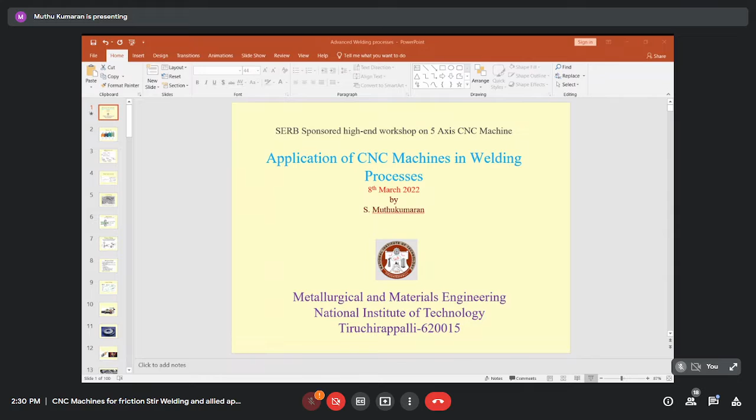Sorry for the interruption. The slide got stuck from the first slide, sir, it's not moving anywhere. I think there is some issue I am having - only my first slide on application of CNC is visible. Even the Industry 4.0 slides are not visible. Let me try sharing again. Some difficulty, let me avoid enlarging - I think that way I can fix it.

Okay, now it's moving. Yes sir, now it's moving. Okay good, let me make it full screen.

What I'm telling you is that we are able to provide a nano coating on the front glass, the viewing glass we have in automobiles. That is a new development - we can avoid the wiper mechanism entirely. So here also, this is precision manufacturing.

All this precision manufacturing is feasible because of the development of microprocessors. CNC machines also rely heavily on microprocessors. All the developments in what we call Industry 4.0 are feasible because of the development of microprocessor and internet technology - these two are the backbone for all Industry 4.0 developments.

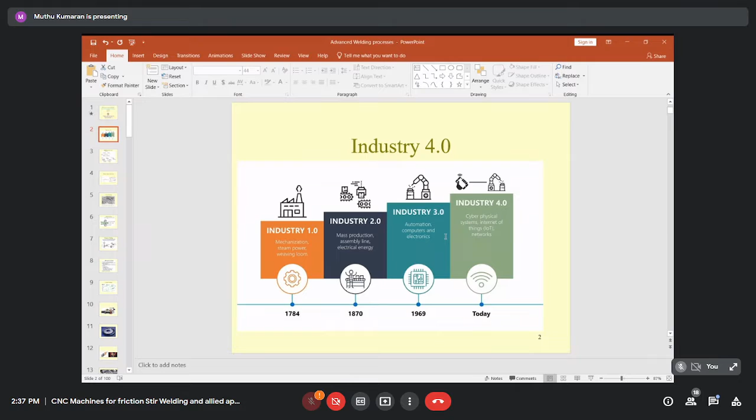Okay, so this slide, I hope the slide is visible. Industry 4.0. The backbone for this industry 4.0 is microprocessor and internet technology. Both are backbone for this industry 4.0.

Coming to different types of processes, I told you just now. Let me discuss the importance of this CNC controlled machine in manufacturing, in particular welding, because machining operation has many lectures already, and many lectures are yet to come. Let me focus on this area because this is also a very attractive field, welding engineering. Very, very interesting, and lot of job prospects are there.

Let me explain the requirement of a CNC type machine, what are the challenges in using CNC type machine in this welding application.

Classification of joining, you are able to see. Dr. Dinesh, is it okay? Am I audible? My slides are moving. Yes sir, it's fine. Shall I proceed? Yes sir, yes sir, okay okay.

So, see, broadly we can classify welding processes into solid state processes and liquid state process. And in both these fields, CNC control machines are used, both solid state and liquid fusion welding processes, for automation and precision manufacturing.

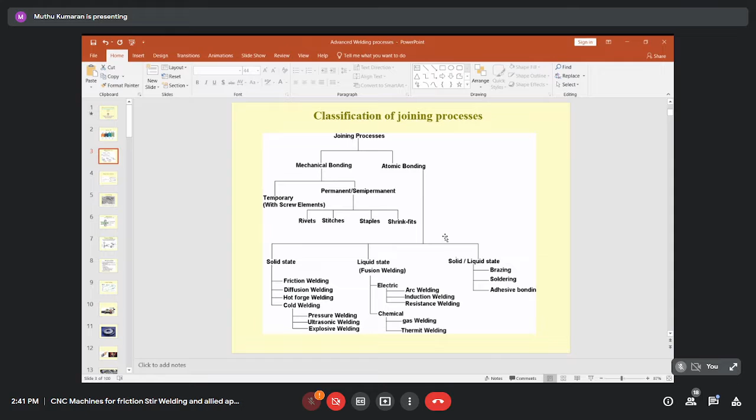It would be very interesting to note the challenges. We know automation, CNC machine controls, and we are able to make programs, but it's very interesting to note that there is a lot of challenges in designing a CNC control machine for solid state welding processes. I'll show some machines and explain how complex it is. For that, you should know the basics of welding, the very basic behind joint formation. Only then can you appreciate the requirement for CNC machines. Without understanding what is happening in welding, you may not be able to understand the complexity of designing a CNC machine for a particular welding process. Let me take two or three minutes to make you understand what is happening during welding.

Suppose two atoms we have at infinite distance. Left hand side, let us have one atom, right hand side I have one atom. This left hand side atom is having electron and proton. This right hand side atom is having proton and electrons. Here left also having electrons and protons.

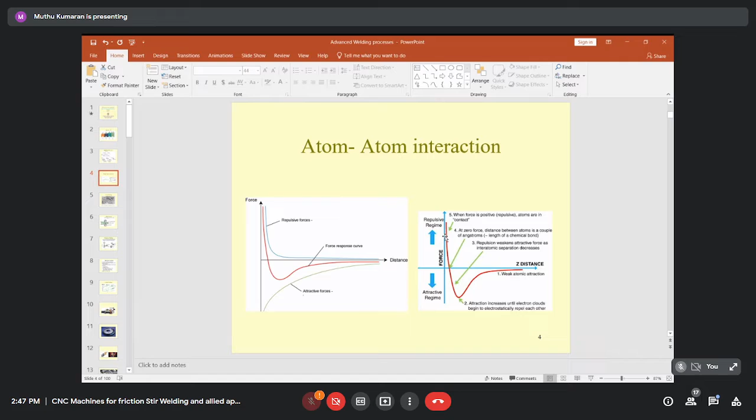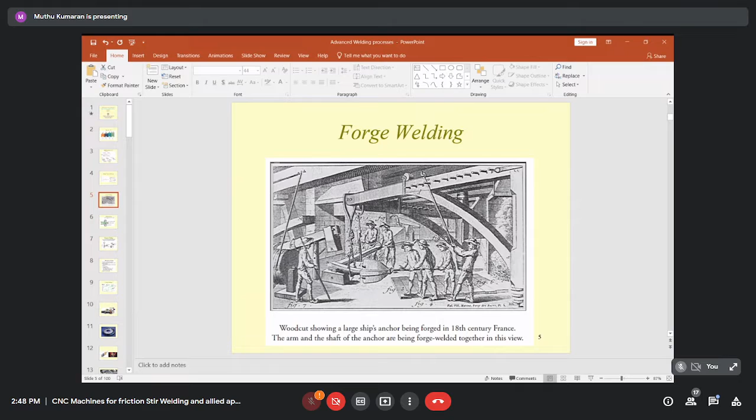So this is an older method, very crude method. Even our iron pillar, even today it is rust free. It was a forge welding process, the oldest method of joining process. Just I'll skip this thing.

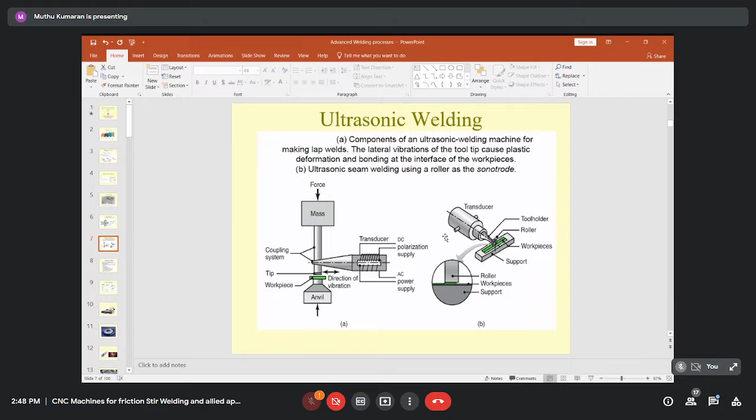See, all these are ultrasonic welding processes. This also needs precise control, controller, microprocessor control based on the application. Again it depends upon the application, where we are using it, that is important.

Coming to friction welding, just as I told you, two rods, friction heat is generated, and a force is applied. It looks very simple, but because of this force component, of the order of 10 kilonewton and 12 kilonewton, we should have a rigid machine, and that too with micron level precision. It is very challenging because with force, a lot of deflection used to happen, but still a lot of controls are essential to achieve the required precision.

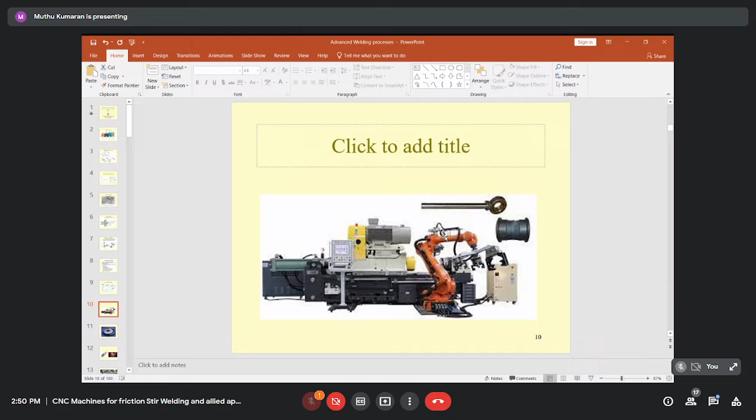Even a piston is made by friction welding, I'll show after 2 slides. This is manufactured by a CNC controlled friction welded machine. Suppose a four-cylinder engine, four pistons we need to assemble, so we need to go for mass production.

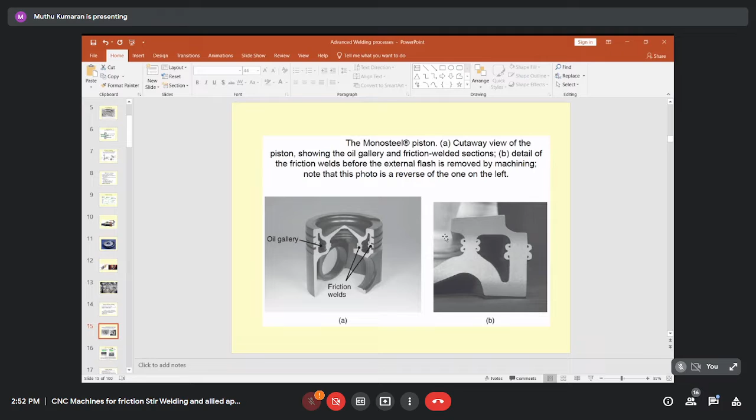As you know, a lot of forces are involved in making this component, and still the system should be rigid enough to carry out welding with precision. That's why the machines are very expensive. These CNC controlled machines for automobile manufacturing, welding machines like this are very expensive because of the force components. That I want to convey to the audience. Okay, now again, this is a linear, see, simple.

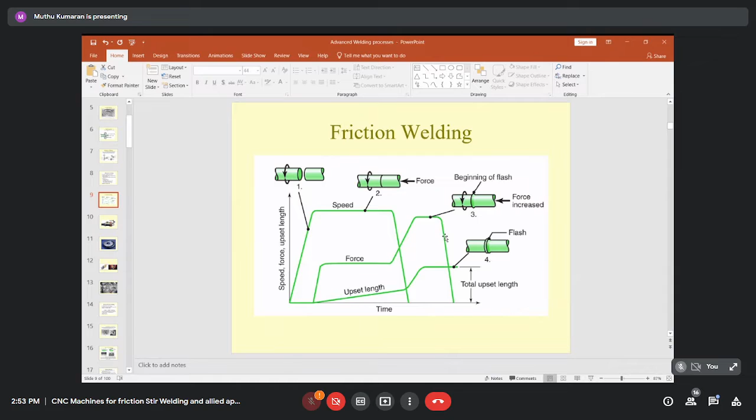One rod is rotated, one rod is stationary. Force is applied, and it gets into plastic condition because of friction, and the force is increased. It stopped. It looks simple, but doing everything in a cyclic manner with precision is very challenging. So the machines are very complex to construct, with a lot of microprocessor controls involved, and they are expensive too.

In aircraft, we use two types of engines. IC engines, internal combustion engines. One is the reciprocating engine, similar to what we use in our cars, and another is the turbo engine. In the turbo engine, there's a turbine. The turbine rotates, and this type of turbine blade is used in aircraft.

So by what method can we achieve the welding of these blades? Would anybody give some suggestion? Which method can we use? Which process can we make use of to join the turbine blades? Any idea? No idea? So anybody could share? Anything? If you have anything, you can share with sir. Please, because I want it to be interactive, otherwise I keep on talking.

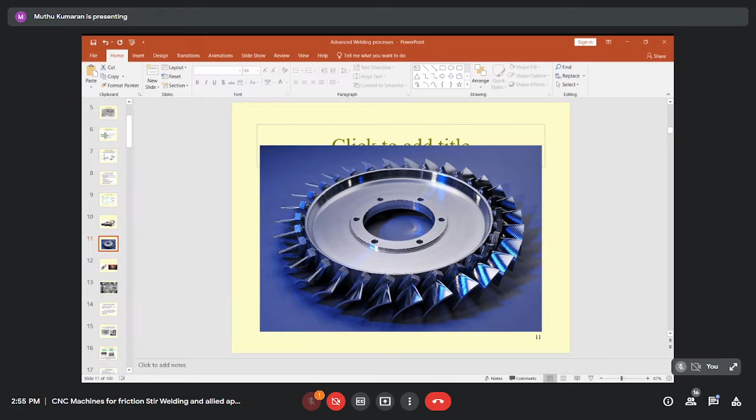Okay, let me share with you, it's very interesting to note. This is welded by linear friction welding. Linear friction welding is a very interesting method where two rectangular shapes are rubbed together, as shown, with force applied. Here the control we discussed, the microprocessor control, is very, very essential to get the desired product.

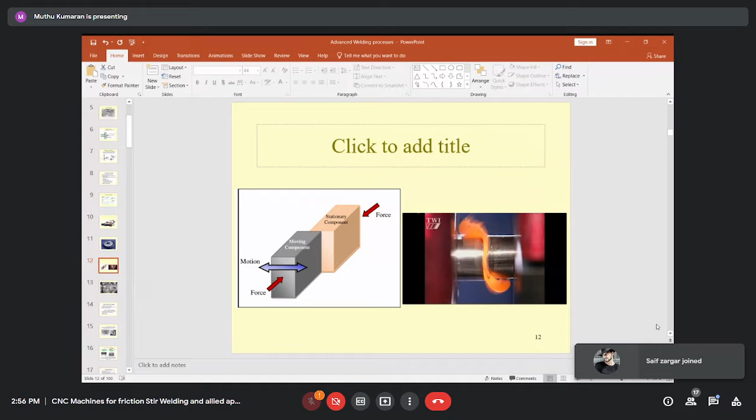This is not a power plant, this is a linear friction welding setup. What I want to tell you is it's not so easy to use a CNC controlled machine. We need a CNC machine, but it will have a lot of challenges which need to be sorted out. So these machines are very expensive.

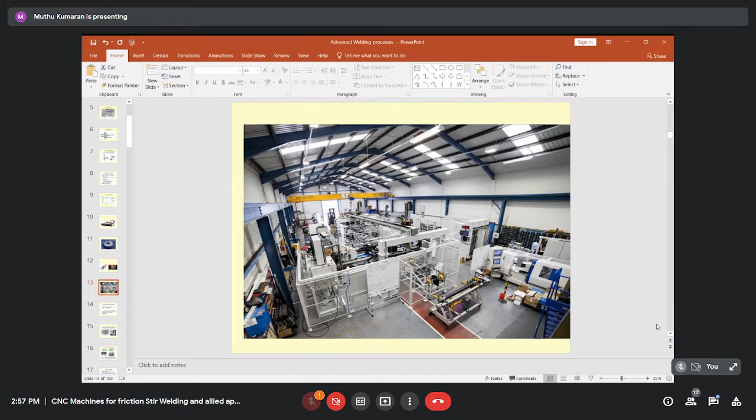Recently, IISc Bangalore, Professor Satish V. Kailas purchased linear friction welding equipment for the first time in our country in education, and he invited us to use his facility. Dr. Dinesh, you also can use the facility because you are also working in the welding area.

So let me skip these slides. See, in aircraft manufacturing, we are safely able to take journeys because a lot of components are made with advanced processes. Precision, here the precision is very, very important. Reliability and precision are very important.

Each and every time, key parts like the turbine blade I showed are checked by the ground engineer. Once the ground engineer sees there is no crack, no macro damage, only then will the takeoff take place. And at every routine interval, they go for repair.

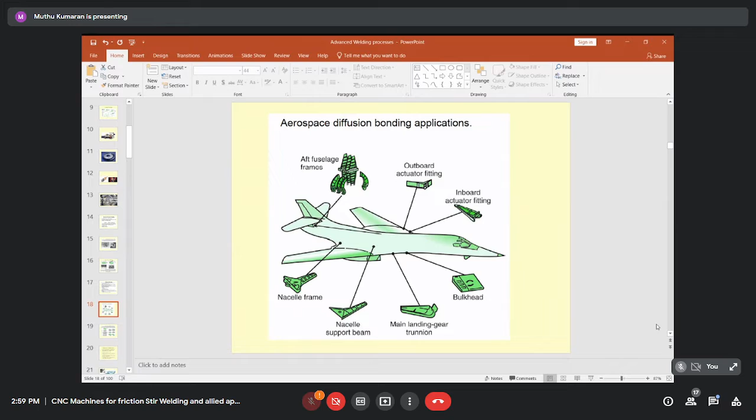One of my students is working at a Rolls Royce engine repair station in Singapore. He used to share a lot of his experience with me. He says whenever an aircraft goes for maintenance, they remove the old engine and mount a new engine, and the old one goes for 3 or 6 months of complete overhauling, kept as a spare in the meantime. It's just like changing a railway engine, they remove it from the aircraft and it goes, but the aircraft remains functional. But for the engine alone, they have to ensure reliability following a lot of code standards.

Yes, let me pass on this. Friction stir welding, similarly, is a very interesting process. It was invented in 1991. It looks so simple, a rod, a tool is rotated, and it generates friction. It moves. We did a lot of research on the mechanism, and we also contributed in this direction. And Dr...

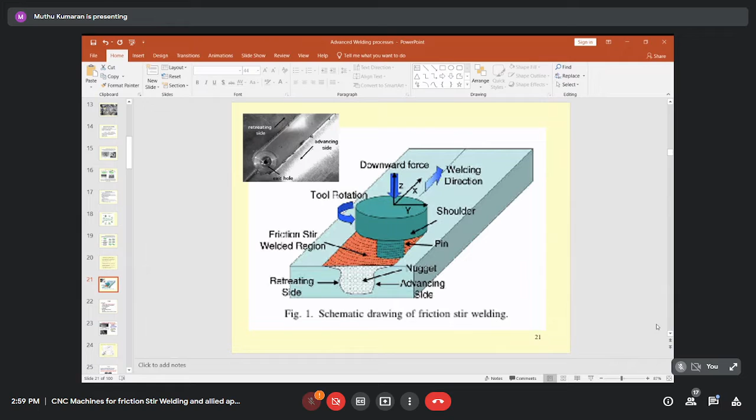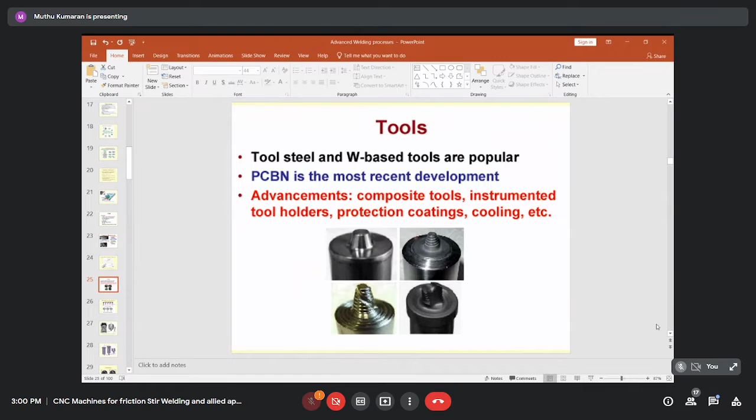So I don't want to talk about the mechanism, Dr. Dinesh, some other occasion if you want you can learn from Dr. Dinesh. It's got a lot of advantages. Only 2.5% of the energy consumed by laser welding is used in this process. That's a very big saving, no? Energy saving is very huge here. And there are a lot of advantages with this process.

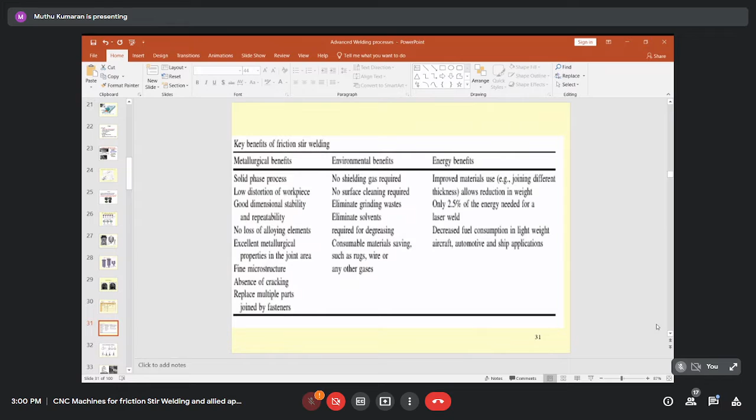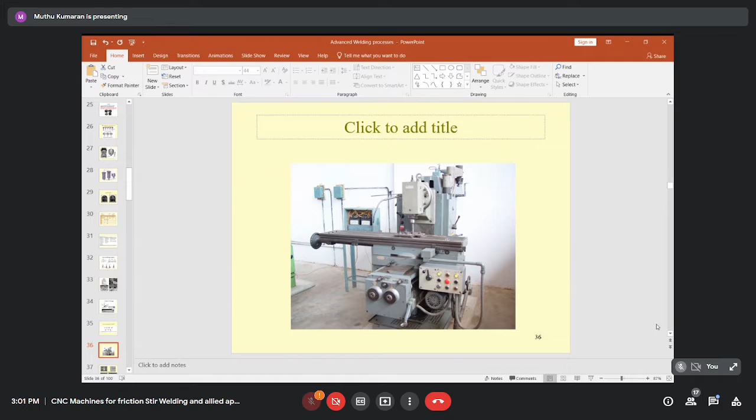There's a lot of variants in this process. So this is a machine which I used in 2004 or so to develop this process. It's a conventional vertical milling machine. At that time I was working in Birla Technology. There I developed this process because at that time it was nowhere available in our country. So with this machine I could publish the first international journal paper in friction welding from the Indian side. And my PhD was the first PhD in friction welding in India because of this machine. This is a very very simple vertical milling machine.

Now we purchased this machine for our lab. When we purchased it, it was 75 lakhs, around 2014. Still it is in working condition. There's a minor problem, but overall this is precision - no matter what we tell, see the rigidity, the structure - this rigidity is essential because of the force component. With this force we need precision. There only the problem comes, there only the challenge. So a lot of controls are essential to achieve the required precision with the force in the range of 10 kilonewton, 12, 15, 20 kilonewton like that.

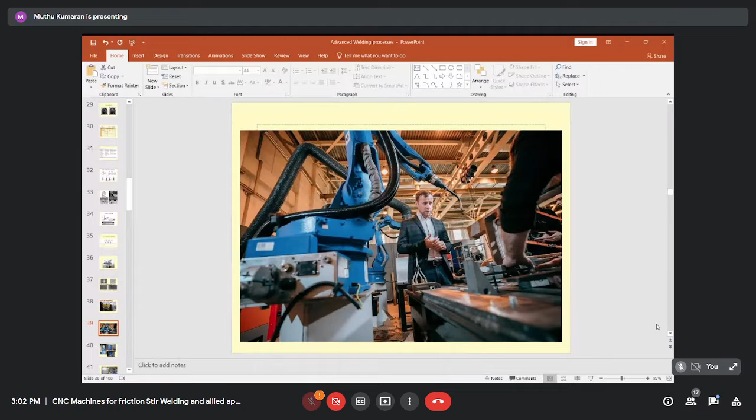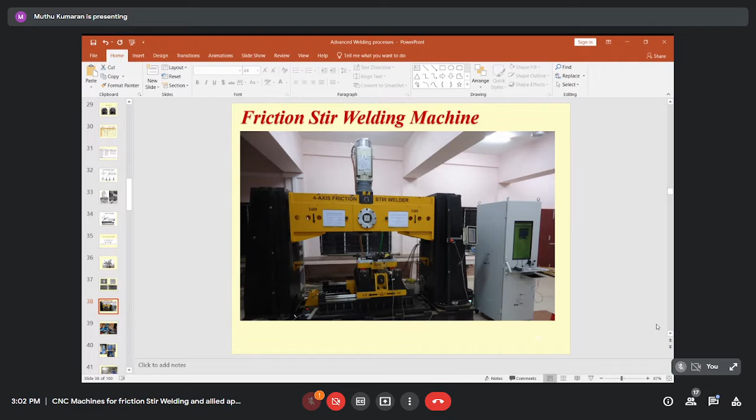So what I'm showing is also a friction welding machine - a CNC controlled friction welding machine for space applications, to make a component with different contours. See, in space we used to call it a mission. Normally if you go to Delhi and come back we call it a travel plan, but they call it a mission because many missions failed due to small deviations in dimension. Because there's a micron level deviation, slightly more gas will pass, and it will spoil the total mission.

So the precision is very very important. CNC controlled manufacturing processes are very essential for space. These are all very precision manufacturing. There the cost is secondary, they need precision - this is aerospace and nuclear. Precision manufacturing is very very essential.

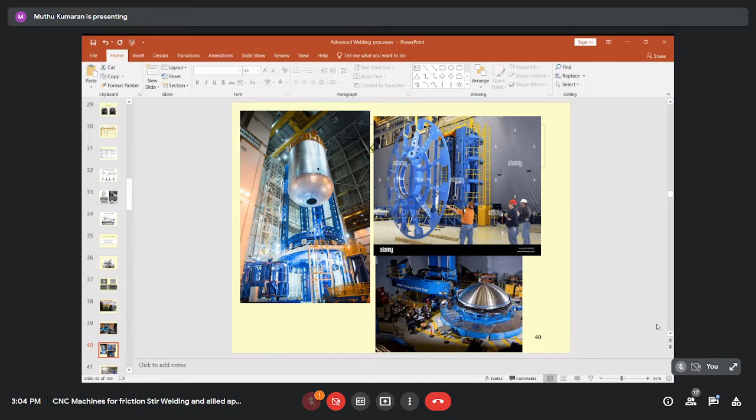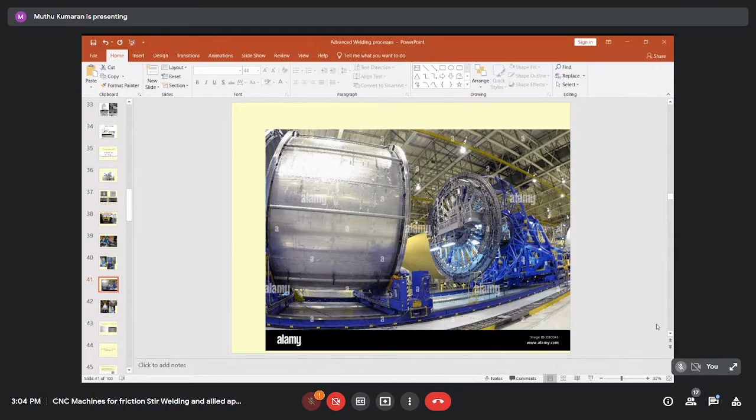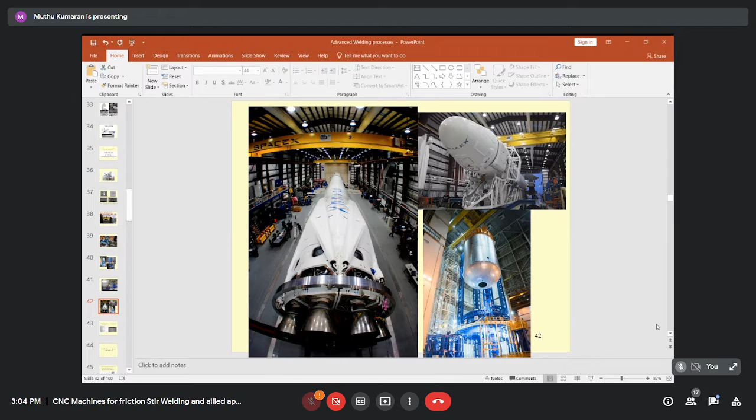So this is another arrangement for friction welding with our CNC control. You can see here SpaceX, Elon Musk - he is showing a lot of interest in SpaceX. So these are all friction welding machines available in SpaceX to manufacture some of the key components. So this metal flow, let me skip.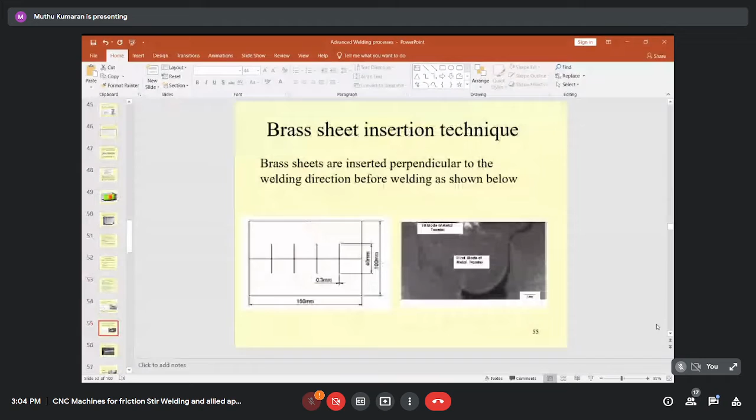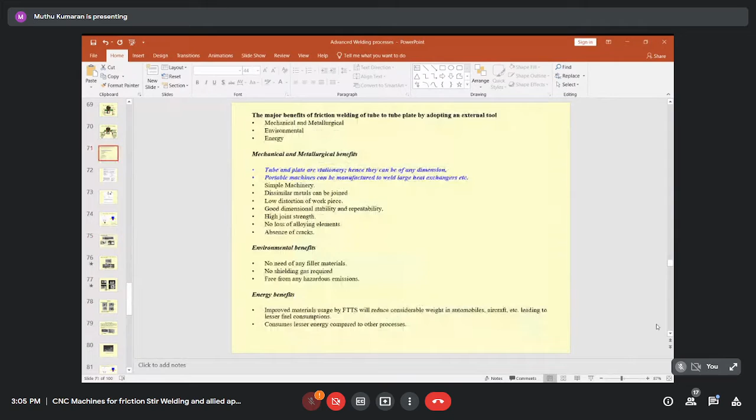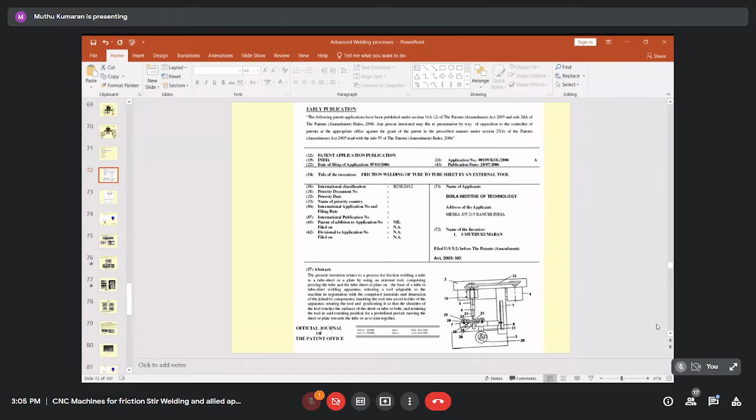In the lab, whenever we are doing research, we used to do it with conventional machines. But if you go for products, it will be a CNC machine. This is another interesting process, which I invented in 2004. This was invented by me in the year 2004, and in 2008 the patent was granted - 2006 it was filed, 2008 the patent was granted. This is another simple process, let me explain the basic principle.

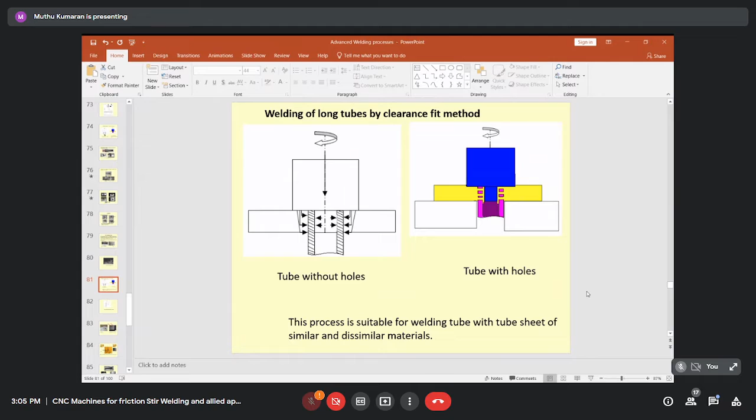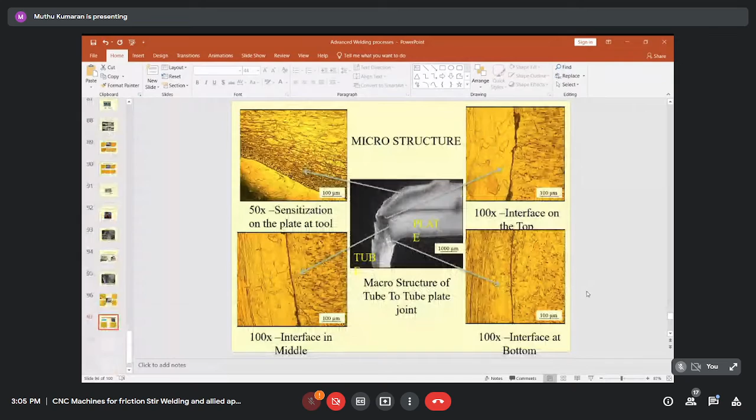See here, this process is to weld a tube and tube plate - the plate is kept and the tool is rotated, and the plate reaches plastic condition. It flows and a solid state bond is formed. So this is a simple process, you can do it with a simple milling machine or drilling machine. I can show different metals welded - a simple drilling machine can be used for this.

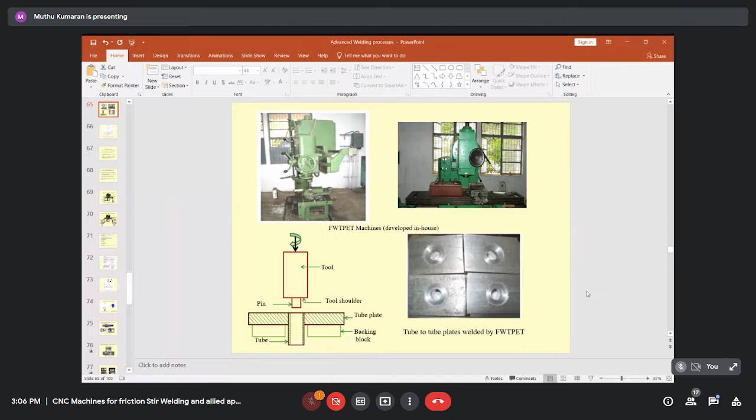But this process is now used in automobile industry, where they go for mass production. With a simple drilling machine we are able to do this work, but now automobile manufacturers want precision, they want mass production, so they are using this process with CNC controlled machines. I thought of giving some idea about this.

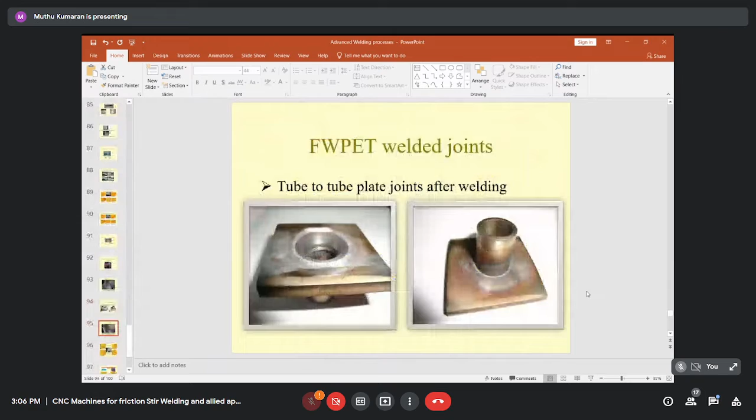So with this, let me stop my lecture and welcome the audience to ask their doubts so that I can clarify. My role is in welding - what is the demand to do CNC controlled machines, and what are the challenges in designing a CNC controlled machine for welding applications? I hope the audience got some information. I'm ready to answer your doubts.

Sir, I have a doubt about nanotechnology. Yeah, please, even though nanotechnology is not directly related to our CNC control, I'm happy to answer your doubt.

Sir, it's a basic question. How do we work with nanotechnology? That's a fine, very interesting question.

Nano is 10 to the power minus 9, pico is 10 to the power minus 12. Nobody talks about pico now, people are talking only nano. Nano 10 to the power minus 9 was known previously also. But why did all of a sudden many people start working on nanotechnology?

Any answer? Any answer is there, students, participants? Every day we are taking class, so I'm telling you, participants, any answer you have to my question?